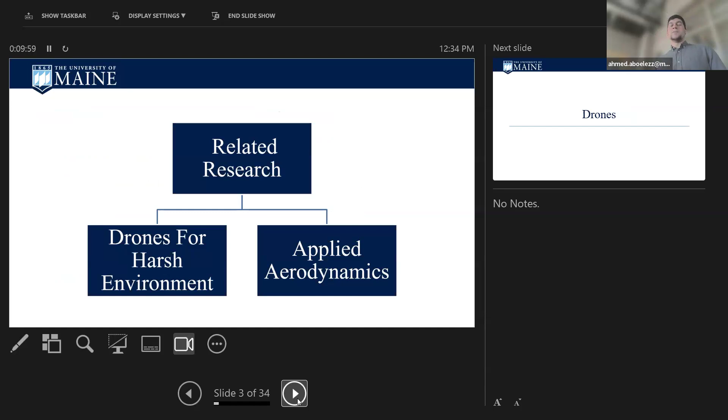So I picked two topics, which I felt will be more aligned with the research being done here in the institute. The first one is drones for harsh environments, and the applied aerodynamics. I have multiple research areas, but I feel this will be more helpful in today's presentation. So for the drones point, drones nowadays are being used in everything. You can go to the market and buy one online, so it's easy to get a drone.

But I am interested in designing a drone for a certain purpose or a certain need and customizing the design of the drones. This customization helped me develop drones for the mining industry, for helping people in doing mapping, collecting data, a lot of stuff. So in the first part of my presentation, I will show you some real cases we developed before. And at the end of the presentation, I will propose some ideas how drones can be used with Climate Change Institute researchers generally.

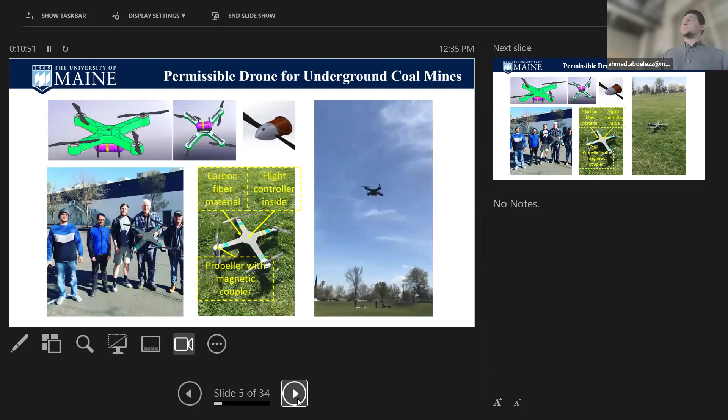The first project was designing and manufacturing a permissible drone for underground coal mines. Usually, there is a huge restriction on any tools that can be used in underground coal mines. And this tool should be permissible or explosion proof. So making a drone explosion proof will make it very heavy. And the design of this project was very challenging.

So we started this project, and it took about 2 years, and it was funded by NIOSH, which is government, but related to miners' health. And this is, if you can see my pointer, I think.

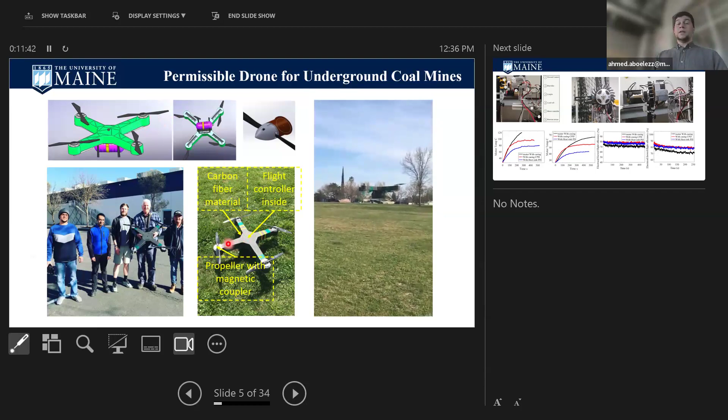Yes, and this was the design of the drone after our phase in the conceptual design and optimizing the design, and this is the final product of the drone. We fabricated it from carbon fiber, and we even developed a new propulsion system. So the propulsion system is a system which gives the drone the thrust or the lifting force.

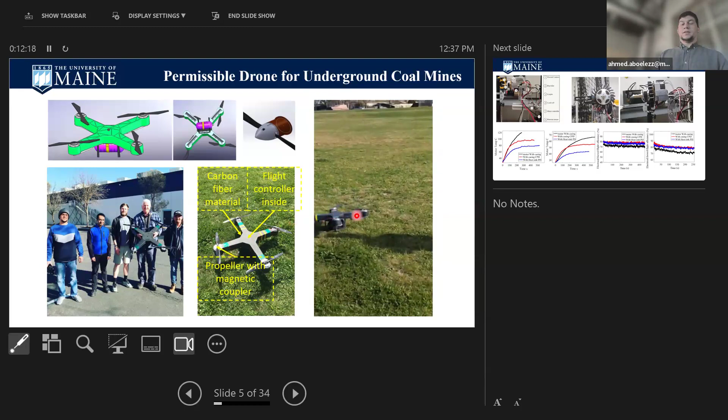And as we mentioned, we need to design an explosive-proof drone. So the motors should be included inside the drone body. And that's why we use a magnetic coupler, which is a new method we implemented in our research. So we have the motors inside and our propeller outside the drone body, and there is a magnetic coupler that couples the torque between the motors and the propeller. So the propeller starts rotating, and this was a video showing the test flight, which was successful.

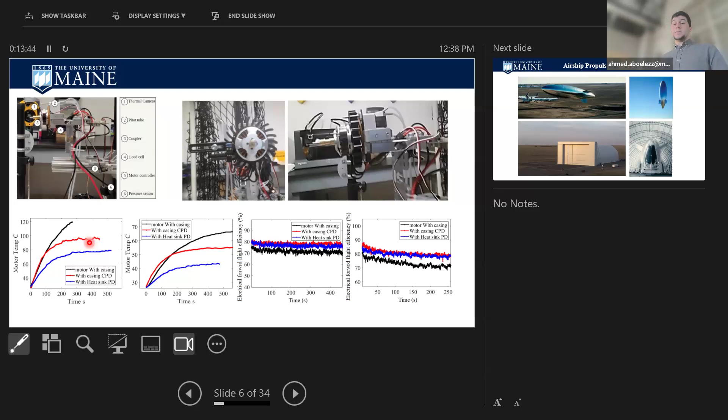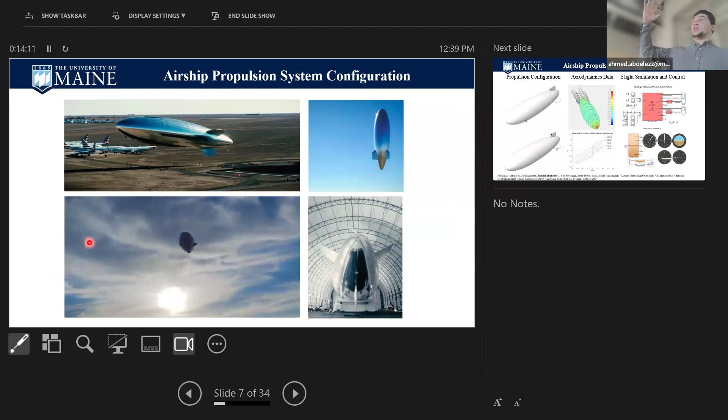A different project for Sceye company. Sceye is a company in New Mexico, and they are building stratosphere airships. So they collaborated with our team, and we were trying to design a propulsion system for their airships. The idea: they need a propulsion system for altitude change of their airship at the stratosphere altitudes. We started the project by proposing some propulsion configurations. So maybe you have a propeller in one of the fins and two propellers in the front near the nose of the airship. Maybe you have three propellers at the fins at the end of the airship.

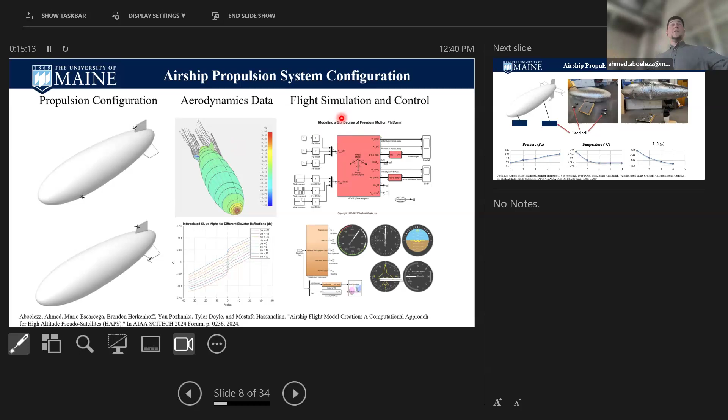However, whatever the configuration, we obtain aerodynamic data, because we need a tool to simulate the flight of this airship, and our door to this tool is the aerodynamic data. So we obtain the aerodynamic data. Later, I will give more explanation about the aerodynamic data, how we can obtain it. But once we got the aerodynamic data, we could develop a flight simulation. And in flight simulation, we could predict the flight behavior of this airship in the stratosphere altitudes through software simulation without needing to go to the actual experiment. So first we do simulation, see the behavior, then we do our experiments.

Furthermore, we did some experiments with a model for this airship. So the actual airship has a length of 60 meters. So we built this model, which has a length of 4 meters, and we use this model to validate our simulation. So when we compare the results from this experiment and the results from the simulation, once it's valid, we can now use the simulation to predict the flight of the big airship.

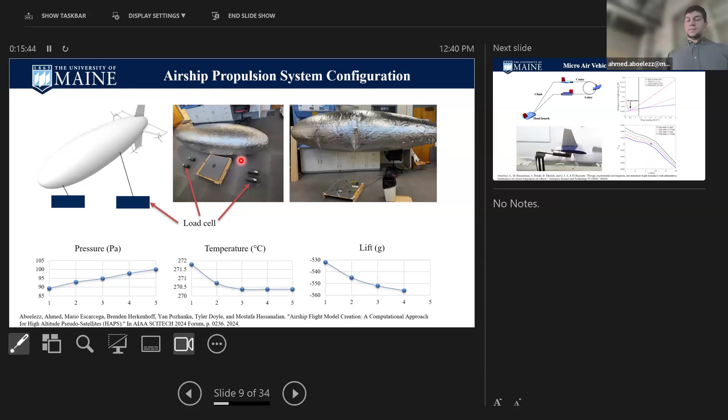And if you are in a certain region and you need something for surveying or anything, you can just get it from your backpack and throw it, do the mission, collect your data, and it comes back to you. Usually, you would expect it to be easy because it's very small. But the idea is, it's easy in manufacturing, but its aerodynamics is very complicated, even compared with conventional airplanes. So we spent a lot trying to get some aerodynamic data for this fixed wing drone.

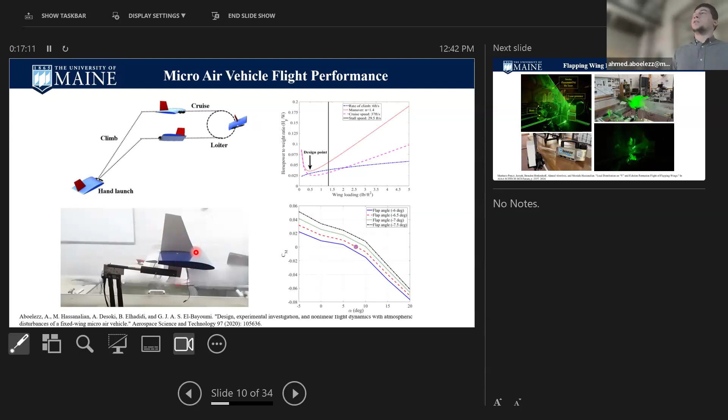And here we can see the drone inside a wind tunnel. The idea, we wanted to collect this data to again generate a flight simulation, predict its flight, and also we needed a tool to validate the equations we are using to predict this aerodynamics. As I mentioned, these platforms had non-linear aerodynamics, which is very difficult to predict. So it was a very challenging project as well.

Furthermore, we looked at if we have a flapping wing drone. So if you would like to get some data near wildlife or something, it would be better to have a drone that looks like a bird, so you don't scare the animals.

Furthermore, we also tried to see if we have a swarm, multiple drones flying next to each other, how these two wings will interact with each other, how I can improve the efficiency of the system if I adjust the distance between each bird. So also investigating flying in swarm, how efficient these formations are.

It's not only about the flapping wing, but we also investigated the coloration. So in real cases, you will see birds full of colors, and we had a hypothesis that the bird has pattern color because this color improves the flight efficiency. That's why there is a pattern. That is why there is no single color for all birds.

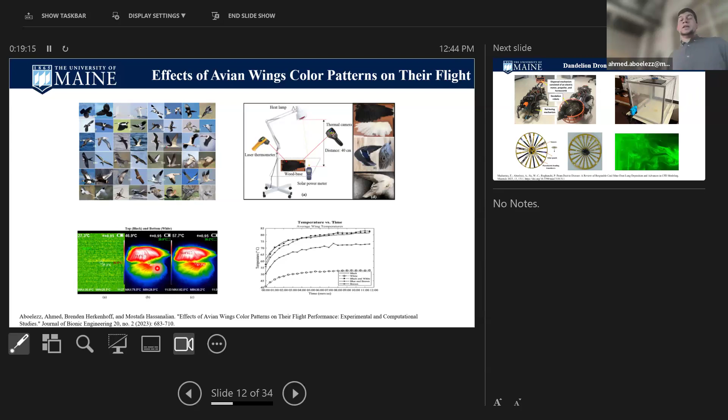And we also used this to develop some theory that maybe we can paint our drone with certain colors, which make it more efficient. So it was inspired by birds' colors.

Another project was to design a dandelion drone. So this is a very tiny drone, and you can have a bunch of them, throw them in the wind, it will spread them over an area, and then you can collect data. It's a good method to collect data from a wide area.

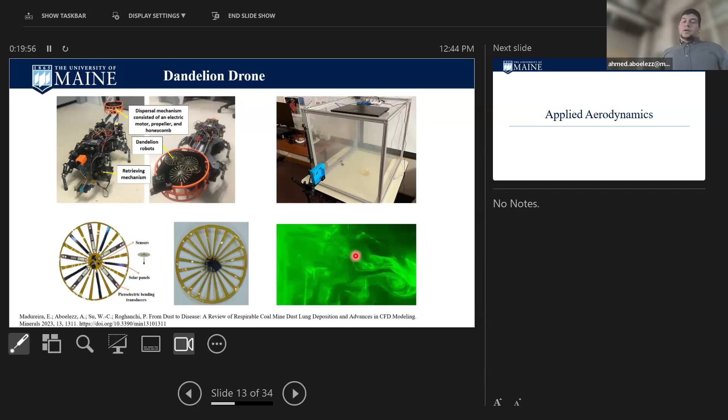Now, I will also mention some efforts we made from the applied aerodynamics perspective and how an aerospace engineering group can contribute to different applications. One of the projects was for the wind engineering industry, and we helped in developing a method to improve the efficiency of the vertical axis wind turbine.

So generally, for wind turbines, there are two famous configurations: vertical axis wind turbine and horizontal axis, depending on the axis of rotation. So if the axis of rotation is here and the propeller or the fan is rotating in this direction, we call it a horizontal axis wind turbine. If the vertical axis is in this direction and this is the rotation direction, we call it a vertical axis wind turbine.

The vertical axis has multiple advantages. The only disadvantage is the efficiency. It has less efficiency than the horizontal axis. That's why the horizontal axis is very popular. And the researchers in this area are thinking if we could improve the efficiency of the vertical axis and keep the other advantages, we can make it more competitive with the horizontal axis wind turbine.

So we developed a method, we call it guide vane wind turbine, and we assumed by adding a vane at the top surface of the wind turbine, it will improve the efficiency. The idea now, I need to know the location of this vane relative to the blade, and its geometry relative to the blade geometry itself. So we made our investigation using experimental and computational aerodynamics.

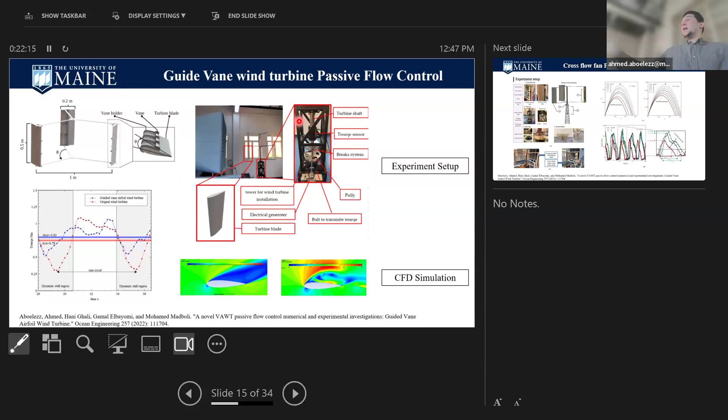Another investigation, also related to the wind turbines, used a different method. We call it cross-flow wind turbine, and we install a cross-flow fan at the trailing edge. So the blade of the wind turbine, if you don't know, has an airfoil shape, and the leading edge is the point where the air hits the blade in the beginning, and we have the trailing edge at the end of the blade.

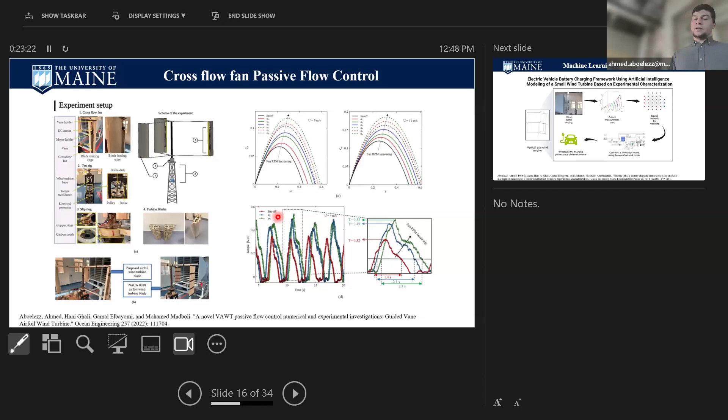So we proposed installing a cross-flow fan at the end of the trailing edge, and we assumed it would improve the efficiency. And to prove the idea, again, we built an experimental test rig, took the measurements and evaluated the performance. I am just trying to show you some showcases of how, for something new, we can develop a certain experimental setup and use it. So the same in your investigation. If you need something related to aerodynamics, we can develop a certain experimental setup to take this measurement and validate your work.

It's not only about making a wind turbine more efficient. Also, we need to simulate it, and it's a very trendy topic now to use machine learning. So we have a huge amount of data, and we use this data to train a machine learning model, and then use this model to simulate the wind turbine in some scenarios. For example, this one, to simulate how this system will behave if you are charging an electric vehicle. So we could also use machine learning with our data set to have more robust and more reliable simulations.

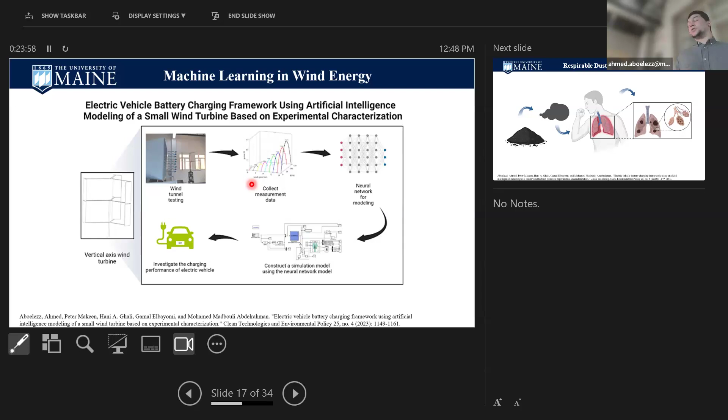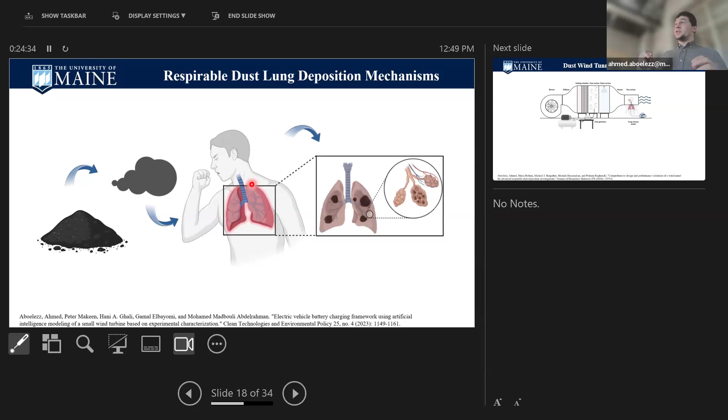Furthermore, I used this knowledge with underground coal mines, and miners usually suffer from a lot of lung disease because during their work period, they inhale a lot of coal dust. So this coal dust deposits in their lungs, and they can develop black lung disease or cancers. So this investigation was also funded by a government. We tried to make some flow simulations to predict in what location this coal dust deposits in the lung.

To do this simulation, again, we need to validate our simulation, because whatever simulation tool you have, it will give you results, but you need to make sure your results are accurate. That's why we always need to have experimental validation. To validate our work and have an experimental setup, it's not logical that every time we need to do something, we go to an underground coal mine, take measurements, and go back to the lab. The idea now: we wanted to have our underground coal mine in our lab.

So we developed a dust wind tunnel, which is not a conventional wind tunnel like the one used in our aerospace engineering field, but it's developed to make some investigations and help the mining engineers do their investigations there. The idea with this wind tunnel is it will have a blower to push the air through the wind tunnel, and it simulates the air in underground coal mines.

To have dust in this air and make it full of pollution, similar to what will happen in an underground coal mine, in certain locations we start injecting dust. And the idea again: which location, what's the dust rate, and the objective is to have a dust concentration similar to underground coal mines. Some researchers proposed using water drops in the underground coal mine to reduce the concentration of the dust, and they use some water sprays. So the air in an underground coal mine is full of dust and water drops, and that's what miners inhale. So we tried to simulate everything happening in the underground coal mine, designing this wind tunnel.

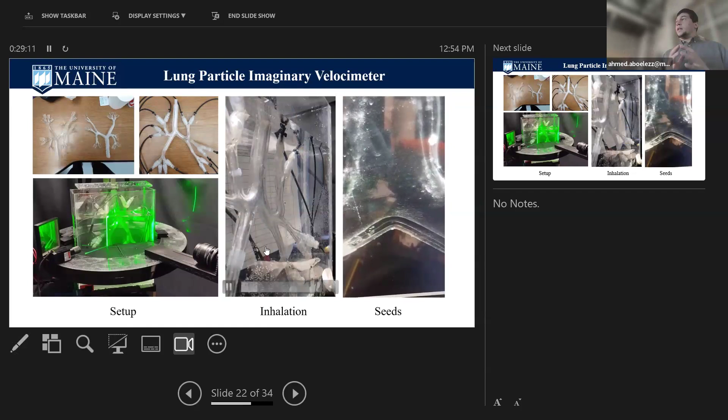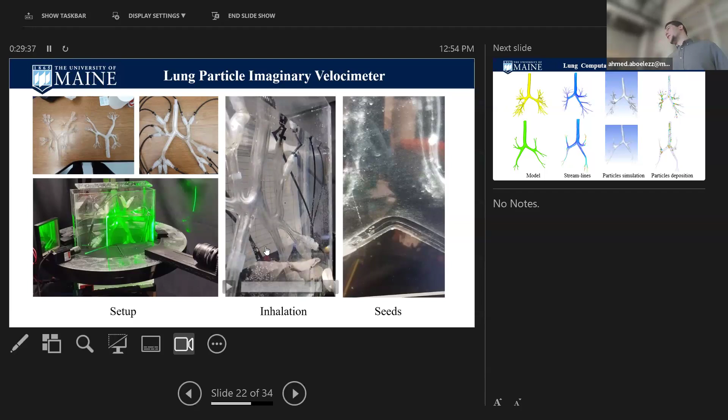So if you look here, you can see the lung itself is expanding, and this was a very difficult experiment, but the results were very rewarding. So we mimicked the inhalation, and we observed how ignoring inhalation in your calculation could affect the results. Because from an aerodynamic perspective, it's very easy to assume and ignore the inhalation mechanism. But how accurate is the result? This was a question we were trying to answer.

And it wasn't only about doing experiments and getting results. We also had CFD simulation, which is computational fluid dynamics simulation. So usually there are some governing equations that predict how the flow will go through the airways. And these equations are very difficult to solve analytically. So we use numerical and computational methods to solve these equations.

And you can start the process by having your geometry. Again, we have, for example, this lung model from a lady in her 60s, and we wanted to investigate how healthy her lung model is. We made our setup modifications, parameters, everything, and we could predict the flow behavior inside the airways.

Furthermore, we could inject some particles. These particles, again, could be your coal dust. It could be medicine. If you need a medicine to target a certain region, this could be very helpful for you. And finally, we can see which regions have more deposition of these particles. The deposition can change with the particle size or injection speed. So the simulation is very helpful, but again, whatever simulation tools, you will have a result, but you need to know if it's correct or not.

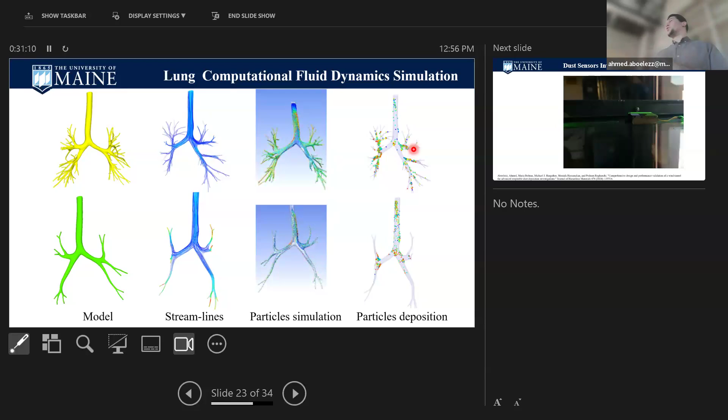Furthermore, we also used the dust wind tunnel to see the effectiveness of using dust sensors. Mining industry engineers use a lot of dust sensors and locate them in different locations. So we tried to help them with some recommendations on where to use these dust sensors and the wind speed limits for using them, and you can see this is an example showing how they interact with the dust sensor. Sometimes they would like to install multiple dust sensors.

So by this investigation, we recommended what the minimum distance should be between each sensor. Even the orientation; sometimes in a certain orientation, you get a better measurement. So this sensor can be used to measure pollution or the dust concentration. But again, by using some aerospace engineering background, we could give some recommendations to improve your measurement process.

So all the previous was a showcase of what we did before using aerospace engineering in different applications. As Paul mentioned, I am a new assistant professor, so I am trying to build my lab and continue doing the same research. So I started the AeroSystems Dynamics Performance Lab, which I am building here from scratch. Right now in the lab, I have this drone cage, and the idea is the drone cage is a safe zone to test your drones.

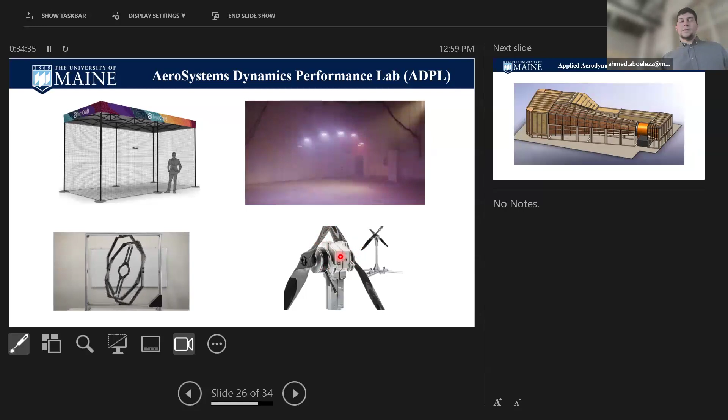The other lab is the Applied Aerodynamics lab. And when I came here, the mechanical engineering department had an old wind tunnel. So I am working now on this wind tunnel to fix its issues, provide it with instrumentation, make it helpful, so we can use it in our research. It will also include some computers for simulations. So it's not just about doing experiments. We can also do CFD simulation like the one I showed you before.

How can this stuff be helpful for you? I think this is the most important topic. And there are a lot of applications. For example, for the drones, if you would like to use a drone to collect data from certain regions, and this region is very cold or it's hard to reach, you can use the drones.

And as I mentioned, I am interested in customizing the drone based on the need. So if the drone will be flying in a cold region, it will have a different design from a drone flying in a desert. For example, how much is your payload? Is it very heavy or is it light? How long would you like to collect the data? All of these parameters will affect the customization of the drone. And this is something we did before and we can keep doing it.

The idea also is that using drones is a very robust tool to give the same data. So if you are scanning a region, you can scan the same region for a year and you are sure you are scanning the same region. There is no shifting. You can even make the process autonomous. So the drone itself can fly and collect your data. This data can be image data or LiDAR or radar data.

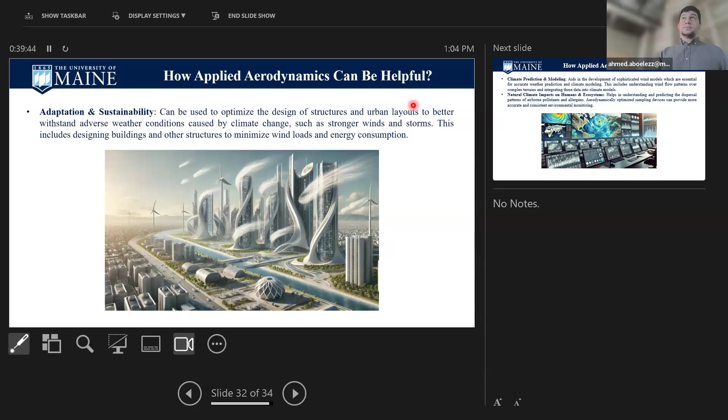Furthermore, if you would like to do some weather prediction, you will need some accurate wind models, and this also can be developed by applied aerodynamics. So you can have some CFD simulation or experiment, and they can help you validate and generate some wind models, which you can use in your climate prediction models. Also, if you would like to observe how pollution is spread in a certain region, CFD can help you, and it just needs some computational tools, but it's very helpful in this matter.

So in this presentation, I started by showing you real cases, what we did before with people from mining, electrical engineering, and the medical sector, and how aerospace engineering was very helpful for them. I also proposed some ideas on how you can use drones in your research and how you can use applied aerodynamics. The main purpose of this presentation is to show you our capability and how we could collaborate with you in your research. Thank you for your time and attending, and if anyone has questions or comments, they're welcome.

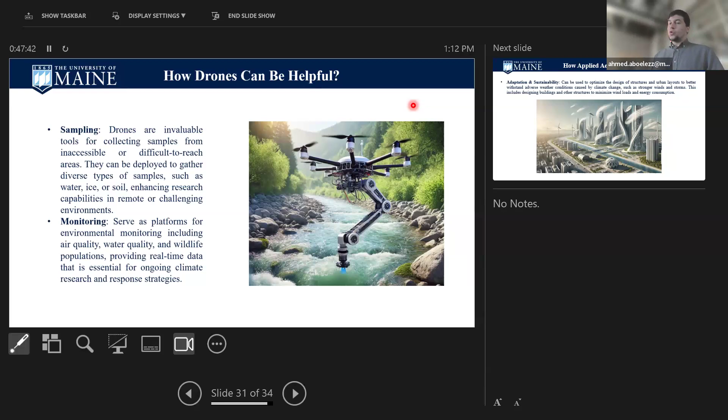And again, maybe you have a higher payload weight. So you don't have to use a multi-rotor drone like this. Maybe you can use a fixed wing drone. As I mentioned, there are some types. These fixed wing drones have very long endurance in flying. But the problem is it cannot take off and land vertically. It needs a small runway. So it's easier to use this one. But the problem is this one has less flying time, less payload capability. So again, it's just customizing the problem based on your need.

And you know, there are some hybrid drones which have both in one configuration, and we call them vertical take-off and landing drones. So whatever you need, that's my interest. I am trying to modify the design based on your needs. Okay, thank you.

Is there somebody in the audience? Yes, okay, there's another question.

So this one question was about what type of drones I am interested in and which one I would be interested in developing. So generally, I worked in both types. I worked with fixed wing drones, from designing and manufacturing them, and the multi-rotor. But I am focusing not only on building the drone. I'm searching for needs, and that's the main objective of the presentation. I'm trying to understand your needs, what conditions this drone will fly in, and I start customizing the design based on your needs. So fixed wing, multi-rotor, hybrid, all of this I've been working with before.